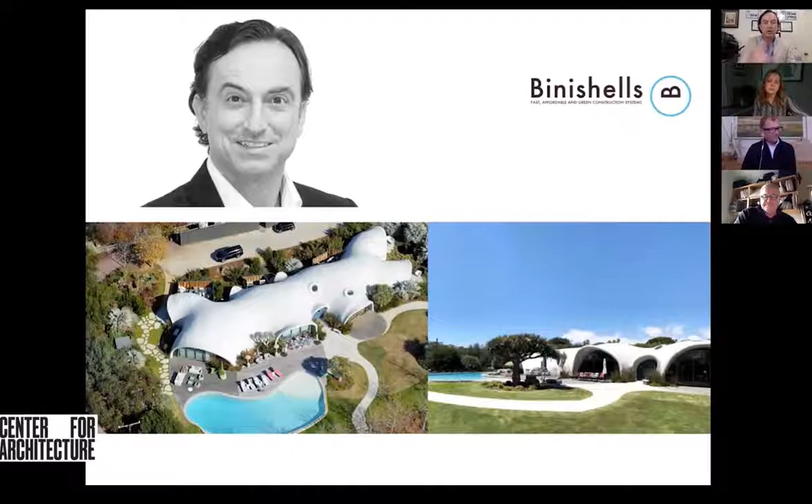Binishells is a construction technology company. So we actually develop new ways of building. And it all started back in the 60s with my father, whose first patent, he developed 250 in his name

in his career, which is still ongoing, was one where he would start with a circular foundation and then over a matrix of reinforcement steel, he would pour wet concrete, and then with 0.5 psi of air pressure, so low air pressure, he would inflate a building before your very eyes of up to 40 meters, 120 feet in diameter.

So quite an extraordinary thing to see as a little boy, your father doing. And I sort of followed in his footsteps. He ended up developing a suite of construction technology systems and is sort of a major pioneer, a major player in the world of construction technology.

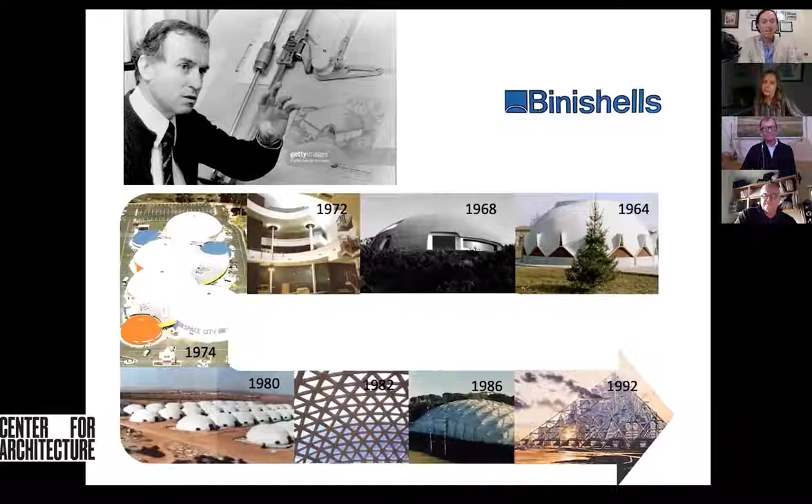Now, I say that almost mischievously because truly there aren't many people in the world of construction technology. When you compare construction technology to something like communication, go way back now to the Roman times, and communication for them was a backbone of how to keep this gigantic empire together for as long as they did. And the network of roads and these couriers would make that happen.

Obviously, a lot has happened since then. You had the printing press, the newspapers, telegraph, radio signals, short and long wave, television, and then the internet, until we get to this extraordinary device that we all have in our pockets, which is obviously the smartphone. You take a smartphone, you give it to a Roman courier, and you blow his mind. I mean, this is something absolutely from another planet.

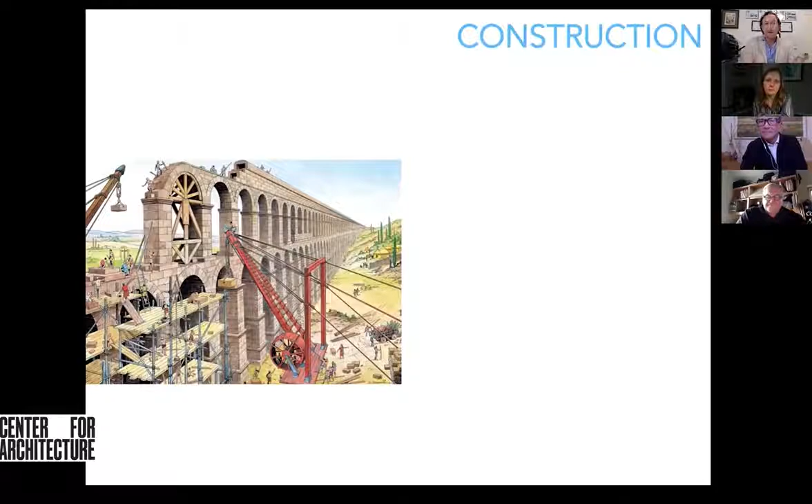Another thing the Romans were very good at was construction. And of course, they had cranes, they had concrete, they used modularization, prefabrication, all of these things that we think of as being actually quite contemporary were developed by them. So by contrast, if you take a Roman builder and you put him on a modern construction site, he wouldn't

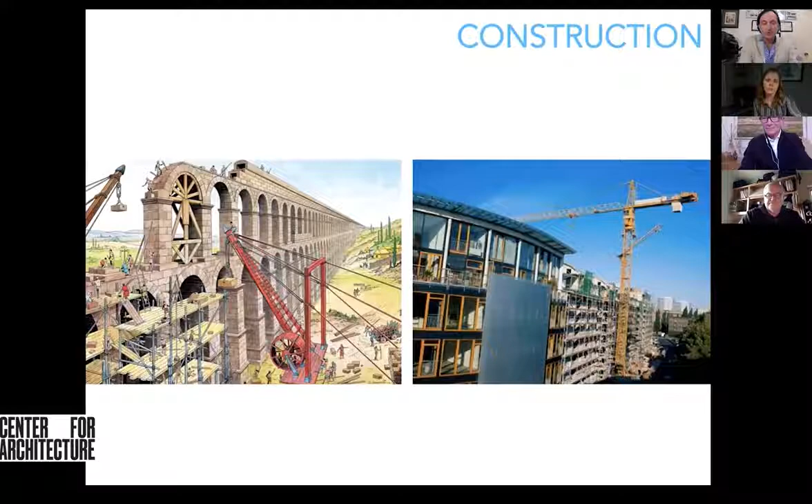be that disorientated. And that may be amusing, but in a sense, it's also extremely tragic because the fact that we as an industry have not evolved practically at all is a real problem. We are supposed to be providing shelters, and yet those shelters are not safe enough.

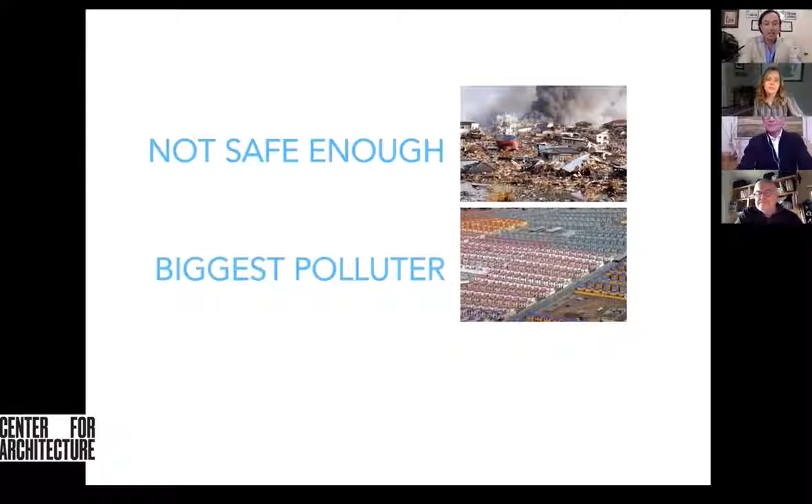The column to beam connection is the weakest connection you could possibly use, and that's why there are no squares in nature. We are the biggest polluter, adding almost 40% of the world's CO2, and that's a major failing in my mind. And on top of it, our buildings are far too expensive, leaving 25% of the world's population homeless. So if you were to look at our report card, and obviously there's a lot of teachers in the panel, you'd have to give us a pretty low grade.

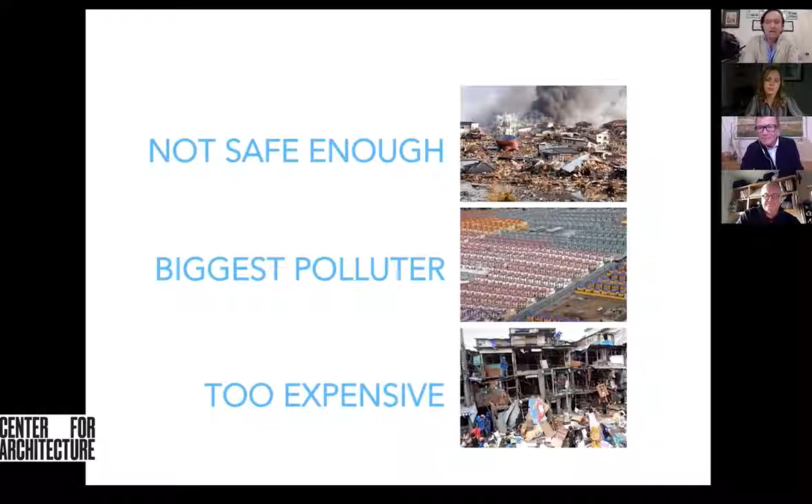So that's why I sort of decided that it was important to follow my father's example and look at different ways of building and have that inform the design, especially with new exciting typologies like the tiny home. So to illustrate, this is a system that I came up with about 10 years ago.

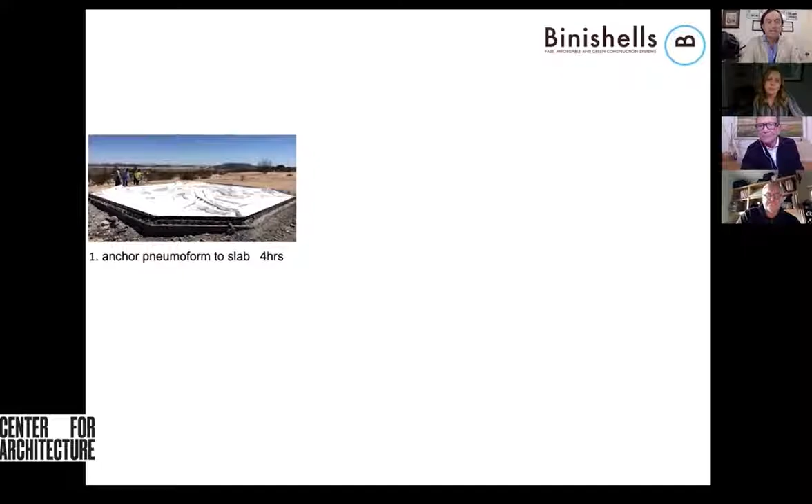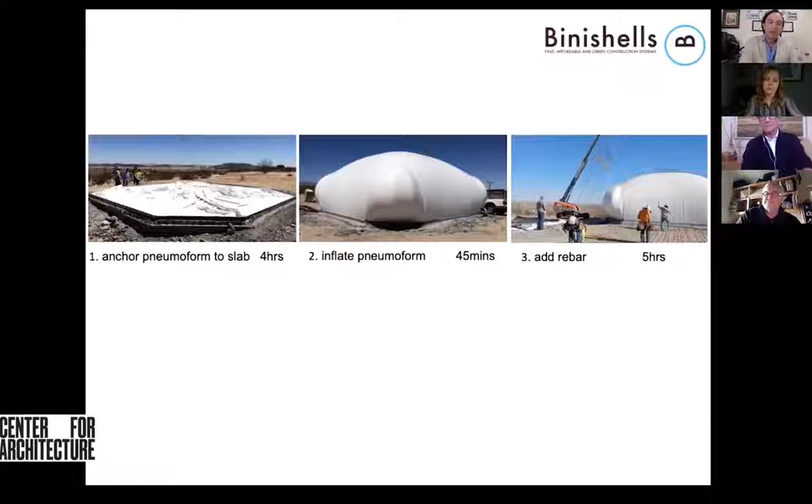You start with a slab on grade, concrete slab on grade, and onto that you attach what we call a pneumoform, a pneumatic formwork. And you inflate that, again, using very low PSI, 0.5, similar to what you use when you smoke a cigarette. And you put your reinforcement steel, which is regular rebar, 3/8 inch, you can buy it at Home Depot. Once that's set and the inspector has come and certified that this is per the engineering drawings,

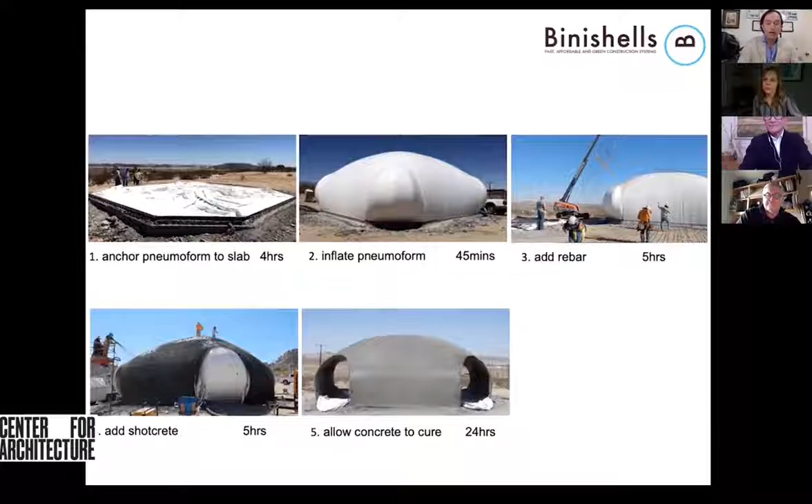you use shotcrete and you apply the concrete. Once the concrete is secured, you can actually deflate then the pneumatic formwork and reuse it a lot of times, even 50 times, maybe more. But what you're left with is this very, very efficient structure, efficient both from a structural and environmental and cost perspective. Here's sort of why.

From a structural efficiency standpoint, we all know eggs work very, very well in terms of distributing their loads. Well, shells do the same thing, especially if they're monolithic. So they transfer loads incredibly efficiently.

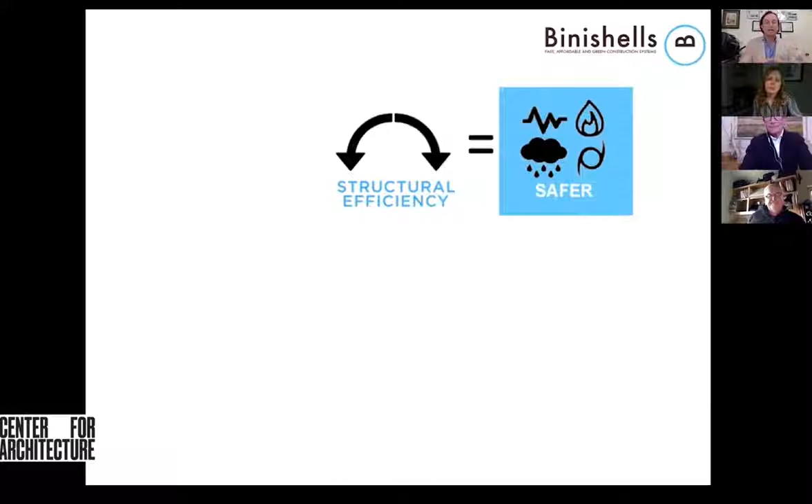Having them be incredibly efficient with earthquakes. Of course, fires, there's nothing to burn, so it goes right over you. And similarly, because of the aerodynamic shape, they're a lot safer in high winds and floods.

With regards to green, as we'll see, it uses much less material, which impacts the carbon footprint, but the life cycle footprint is really the biggest metric that you use in homes because they're supposed to last 75 to 90 years.

And when you have a monolithic, single material, no connection shell as your building envelope, it's highly efficient. It provides you essentially passive house level efficiencies out the door without having any extra expenses. You just have to insulate that concrete according to the temperature zone in which you are building.

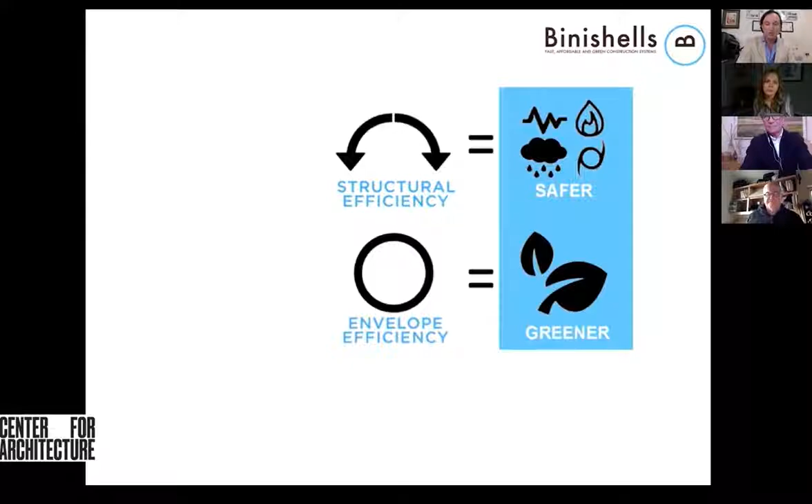And then, of course, in terms of costs, which is critical, the two biggest line items in construction are material and labor. And when you use very little material thanks to the structural efficiency of the structural system, you need less, and less labor because you're sort of letting nature do the heavy lifting with the air pressure. You have a lot of wins, and you can cut costs dramatically.

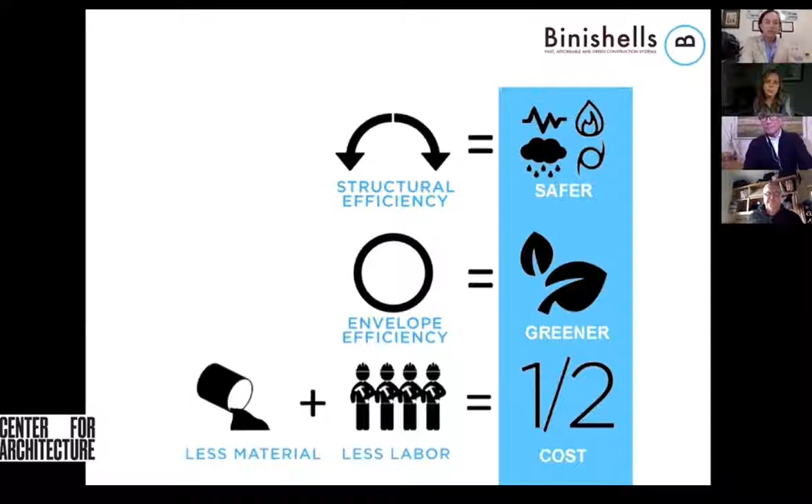We then looked at how one might apply this to the tiny home typology, and in doing so came up with another building system, a new way of building that doesn't use air pressure at all, but results in a very effective building that has all the advantages of a thin shell structure.

We feel that if you site build rather than prefabricate, you're working in the right way, just because we feel that the building envelope itself is too big of a module to transport. On the other hand, you can prefab at the smaller level, and you can have a prefabricated MEP core, so mechanical, electrical, and plumbing core, that literally slides in.

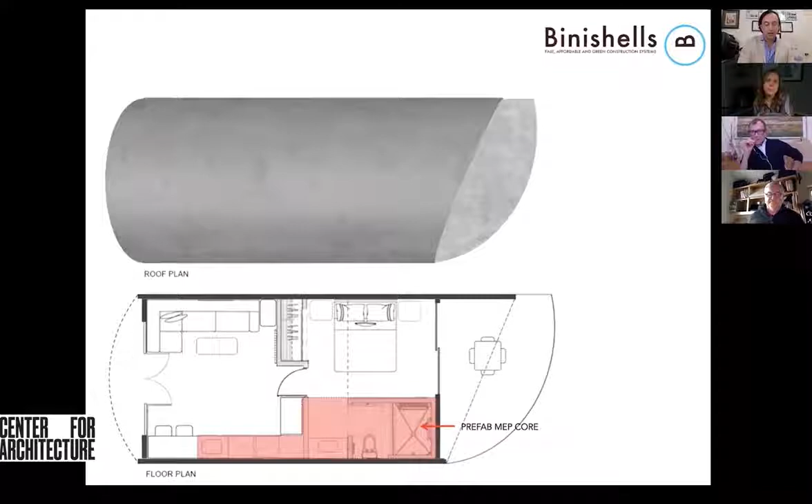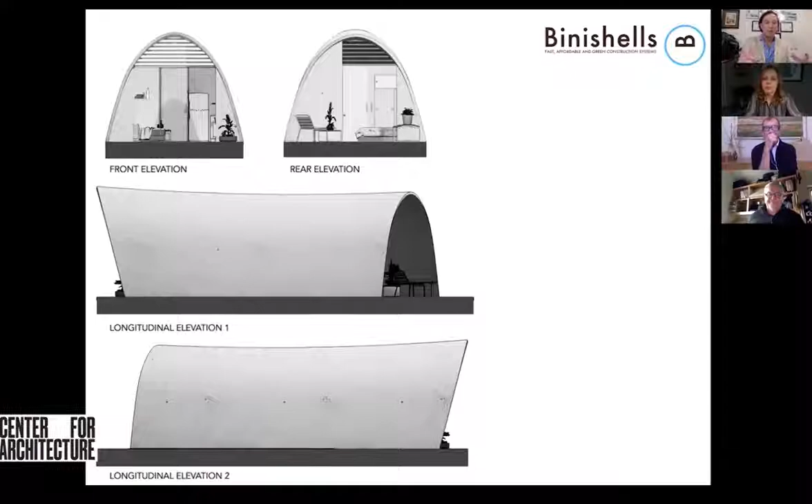It can be factory built, so it's high quality components that slide in, provide the majority of the spaces and intelligence for the building, and make it a lot more efficient in terms of its cost and its quality. The buildings have high ceilings, conform to regular real estate footprints, and are quite elegant.

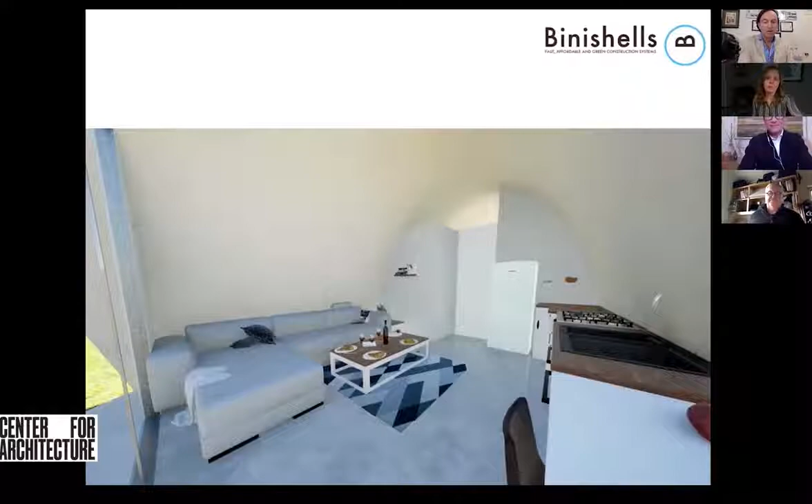And they naturally ventilate and provide airy spaces that, interestingly, can be extremely flexible because the only structural component is actually the building envelope itself. There's no need for columns or beams of any size in this way of thinking. You can cluster them together in little neighborhoods. You can scale them up.

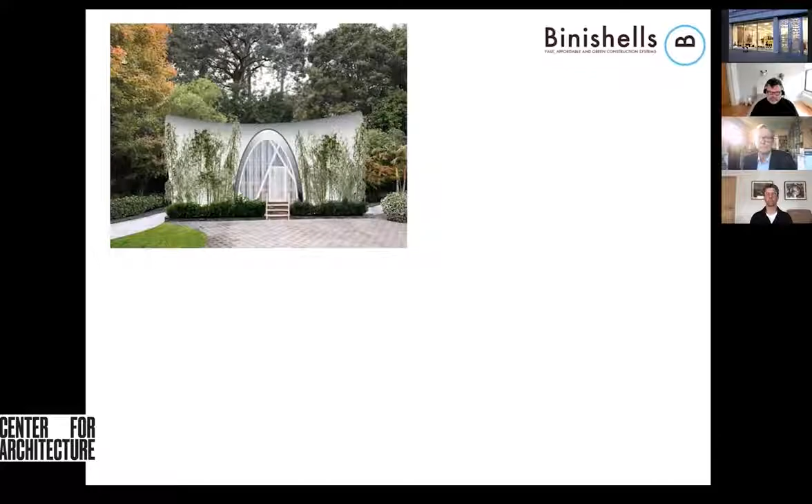This is a 2,000 square foot ADU typology on 2 floors. You can finish them in a variety of different ways. You can combine them to create quite interesting architectural forms.

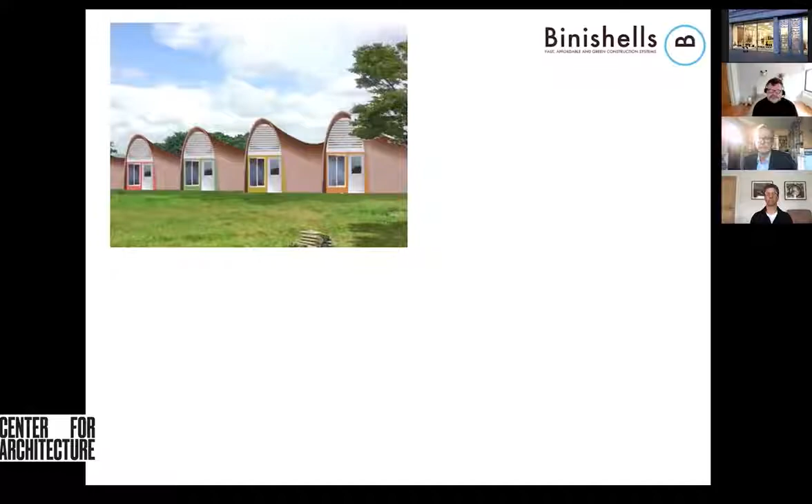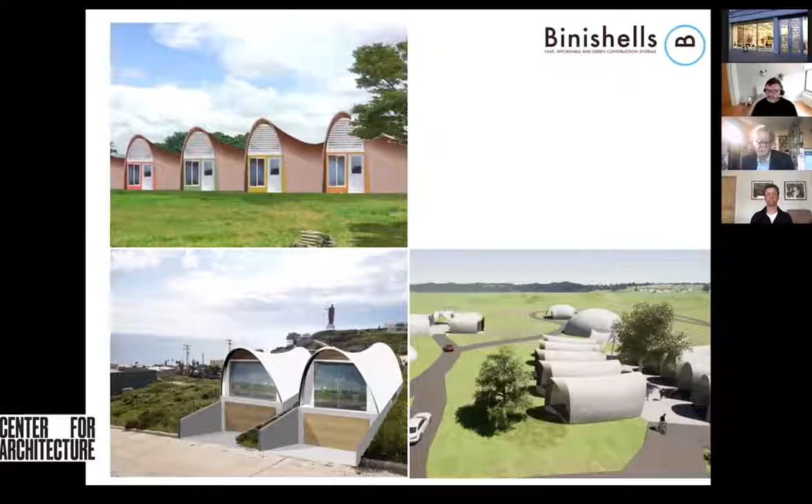And one of the things that we've been looking at for some time, and is one of our major focuses, is low-cost and disaster relief housing. And the idea that everything is site-built, using local materials, local labor, plays into that. So these are very scalable and can provide self-help solutions in those kinds of scenarios.

So to recap what we're doing, looking at how we build, to build safer, to build greener, and then to build more affordably. And then obviously looking at how we build faster buildings using local materials and local labor. We build at a variety of scales, and I appreciate the opportunity to share what we're doing, and looking forward to all the questions that might be coming in.